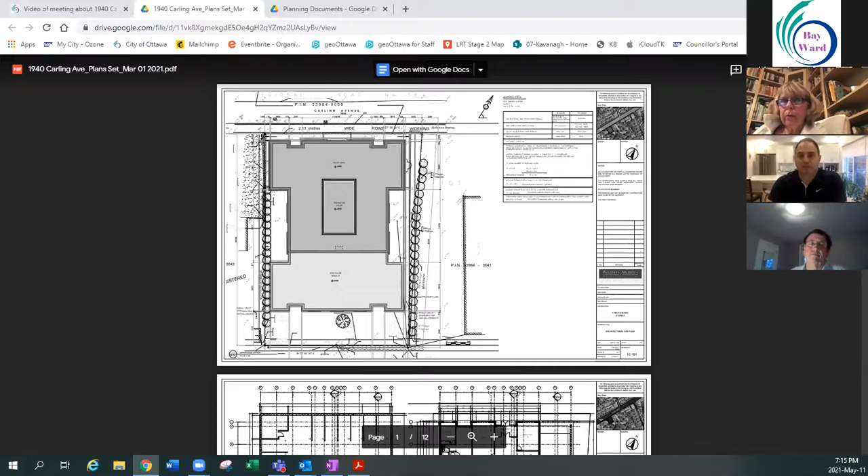In the AM zone, there's a 7.5 meter setback at the rear of the property. Then from the rear of the property for 20 meters, there's a height restriction, shown as the lighter shade of gray on the roof at the back end. That has an 11 meter height limit. Then along the street, there's a 20 meter height limit.

So basically we're going to be stepping the building up. On the lower area, we're looking at a landscape terrace on the roof of the 4th floor and a fully landscaped area at the rear of the property.

What's not shown here, after some of the preliminary discussions that we had, is that we'll also be adding a landscape buffer on the terrace, which will provide additional screening and privacy for the adjacent neighbors on the side.

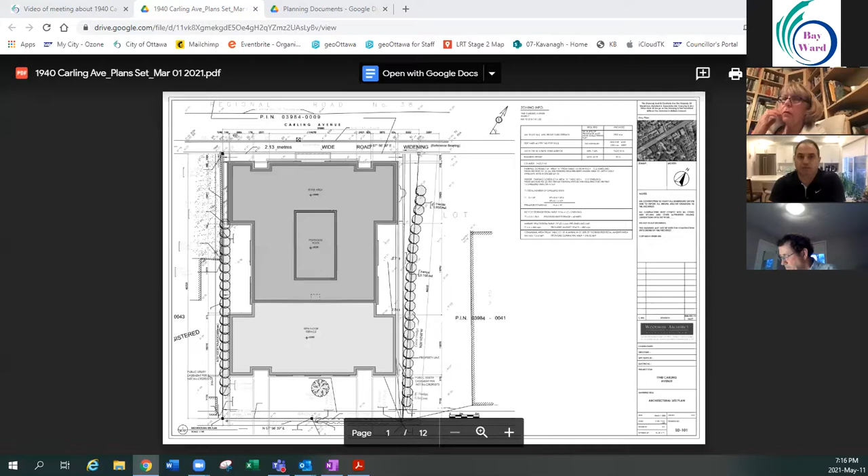There's currently also a 1.2 meter hydro easement that surrounds the site on 3 sides, down the 2 side yards and at the rear.

If you can go to the next one -- also after the first meeting that we had, there was talk about putting all the parking underground. We originally had a concept that had more parking on grade. We're now looking at underground parking, ramping in from the east side of the property.

The ground floor will have a couple of units, garbage, and some amenity space. The basement will also have the bicycle parking. Next.

And that's basically the floor plans. The 2nd floor is slightly recessed where we have the drive aisle. And then the 3rd and 4th floor are the ones on the left-hand side, right-hand side.

Then we step the building back at the 20 meter distance from the rear property line. The 5th floor will have access to the terrace at the back, which is also the south end of the property.

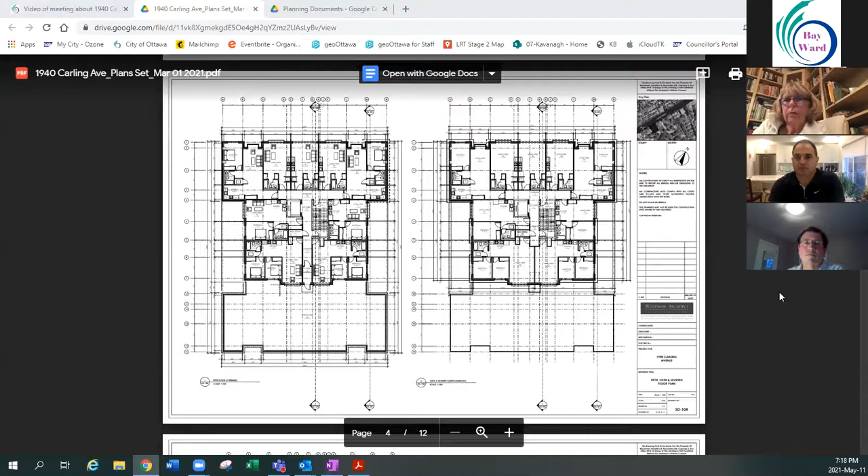So we'll get a lot of sunlight in that area. And also for the adjacent neighbors, most of the shadows will be cast onto Carling Avenue. Then the upper floors are just the units on the side.

Yeah, that's just the roof plan, and some calculations.

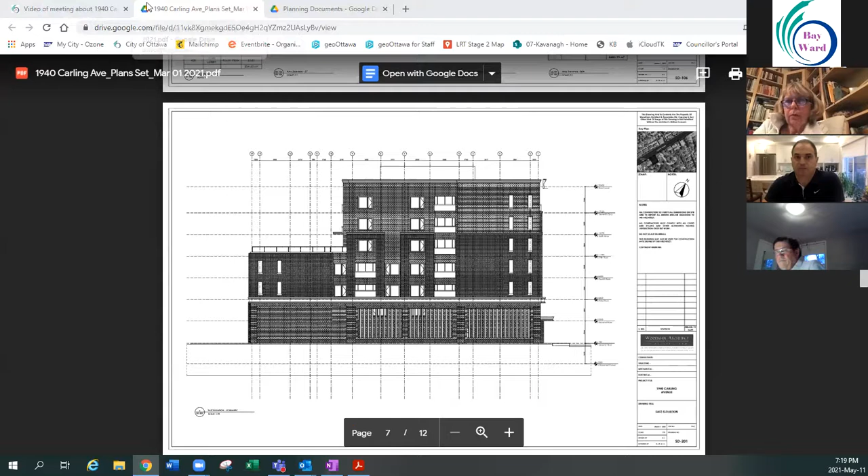The elevations -- do you have the colored elevations with that? These are more the working drawing purposes. Okay.

That's the Carling side. So basically, we ended up with a strong band across the lower base, which ties in with the existing lower residential units currently there, knowing that somewhere down the road those sites will also be developed. We stepped down the brick on the sides, again just to allow for some transition, and then lighter material on top.

So it's basically going to be a masonry building with Juliet type balconies. If you want to show one of the other ones.

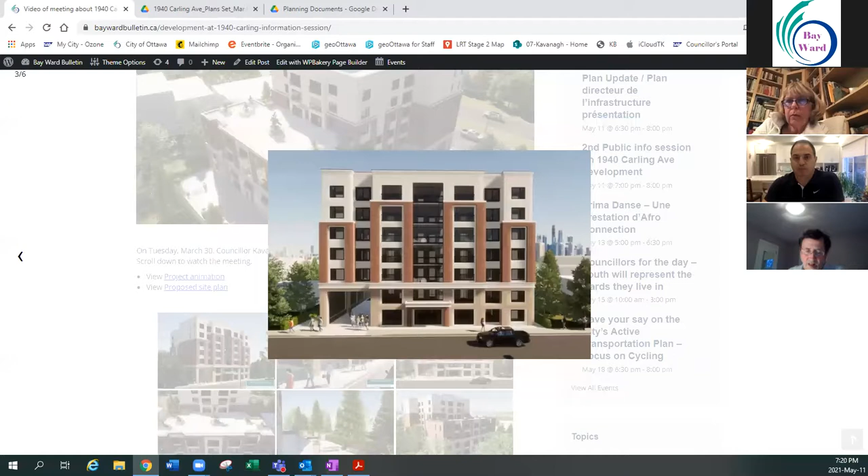Now, we will be adding landscaping at the front of the building as well. This was just a concept. This is a concept at the upper area where it was going to be the amenity zone.

So what we're currently working on is carrying a landscape buffer around the perimeter, which will also provide a bit more privacy for the adjacent properties.

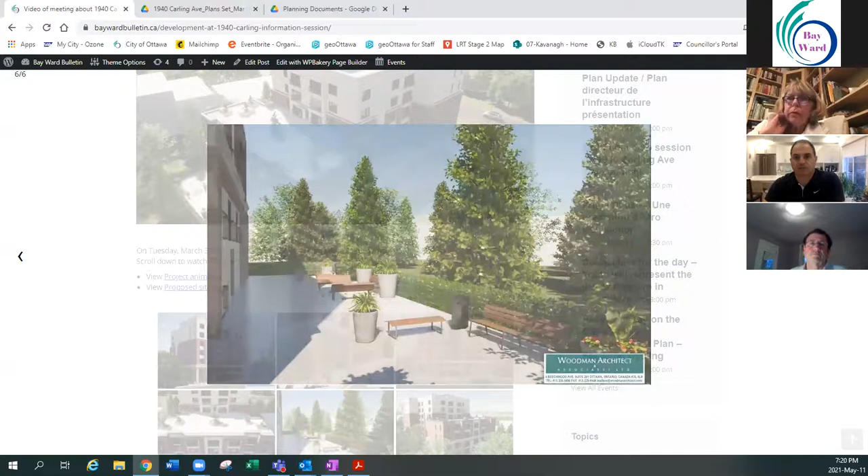That's the rear of the building.

So as I said, the front of the building, we will be adding landscaping and probably some areas for bicycles to be parked as well. And that shows where the drive aisle is to the parking.

So that's about it from our end.

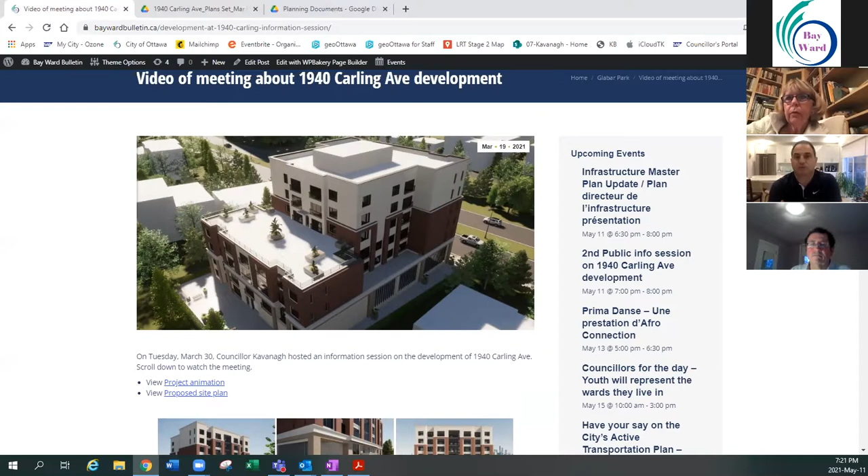Tino, if I could, could you explain a little bit more about the drive aisle and the access in and out of the site for vehicles, not only tenants or patrons, but also for drop-off and deliveries, please?

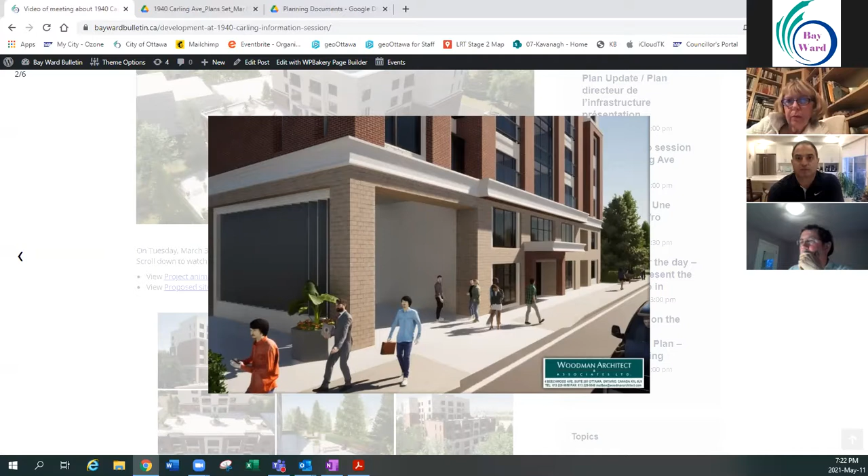Basically, the drive aisle is on the east side of the building. So as you're driving past the building, you see where you're going and you turn in. There's a couple of spots up on the ground floor level, and we're also looking at maybe expanding into the side yard a little bit to provide more of a drop off. But basically, that's the lane that leads into the underground parking.

Yes, garbage will also come out of that area. The main garbage room is on the ground floor. So garbage is contained, bicycle storage, and the main storage for the building will be underground, as will most of the vehicular parking spots.

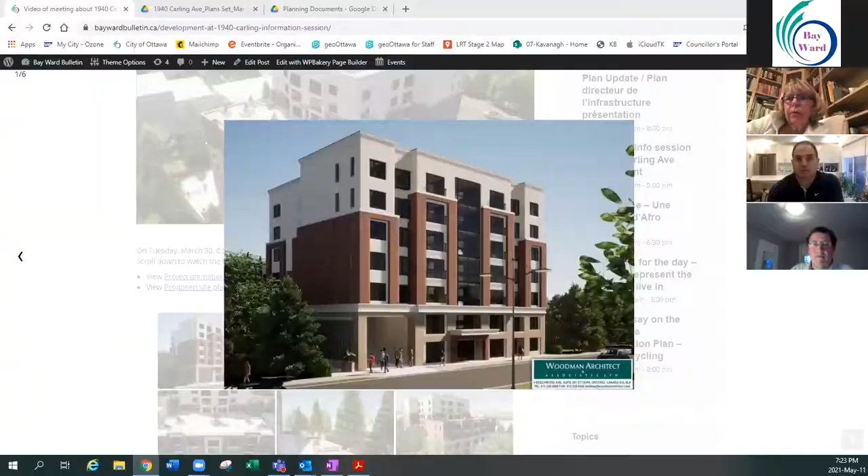Has the number of parking spots changed? No, we've provided the parking according to the zoning bylaw. Thank you. Okay, thank you very much.

I think we can go to questions, unless you have anything more.

We had a question, Dominic, from the neighbors directly behind, and I had the privilege of being at their place on Friday to see their lot. They did have concerns about trees, because these are older, distinct trees, and they wanted to know if you would meet on site to look at some of their concerns. Sure, if they're amenable to that, I will for sure.

No problem. Okay, Councillor, if I could, we didn't get into the details, but because of the underground parking structure, typically you'd go from lot line to lot line. But we have a constraint, or actually an opportunity in this case, where there's a 1.2 meter hydro easement that surrounds the three sides. So right away, no structure can go down there.

But we've also looked at extending that buffer, that actual underground structure, further away from the southern property line, to give what's there a better opportunity of surviving on that common property line, as well as an opportunity to actually augment it with more trees. So we talked about the building setback of 7.5, but that doesn't necessarily relate to the setback of an underground structure. We're already going to be at least 1.2 meters, and likely further away from that southern property line, to address that exact legitimate concern of the neighbors there.

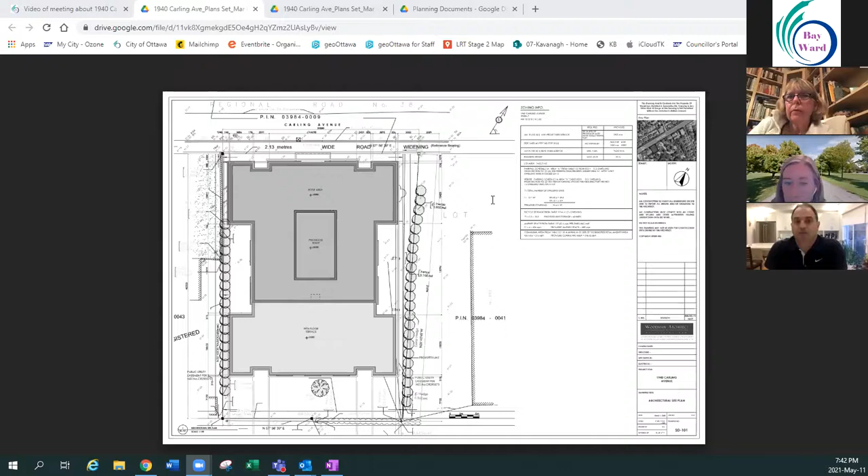Next drawing, please. On the right-hand side, basically, on the eastern side is where the driveway comes in, and about 40 feet in there's a couple of parking spots. That's what we're looking at currently as a drop-off area. Then there would be, we're probably looking at an oversized mail room or box drop-off at the front, where parcels could be dropped off and then picked up by the tenants as they move in. But basically that's what we're proposing. So on the east side there's a couple of short-term parking spots, and that would be the drop-off area.

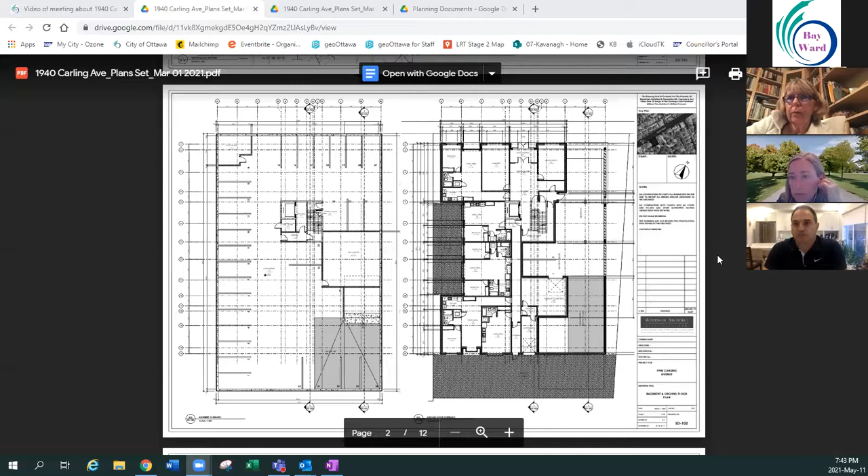We're also looking on the right side, closer to the property line. Even though we can't build on top of that, we can use part of that for parking. So we're taking a look at what we can do with the hydro easement in terms of turning it into another short-term parking spot.

Doug is asking, transit ridership is in marked decline. The overflow will move onto the side streets, and that will lead to bylaw enforcement, thereby changing the nature of the community. I guess you're talking about parking moving onto the side streets. Okay, yeah, and that's what I asked about, the concern about that.

Have you considered the rooftop to be the community outdoor space and leaving the fourth floor roof as green landscape to retain neighborhood properties' privacy? Well actually, at the back of the property it's quite heavily landscaped, so I believe the privacy is there. Going higher is probably no different—when you're closer to the tree line, there's less opportunity to actually look over the trees into the backyards. But with the landscaping buffer we're looking at providing around the perimeter, that keeps users further away from the edges of the building, so it acts as a screen to the adjacent properties.